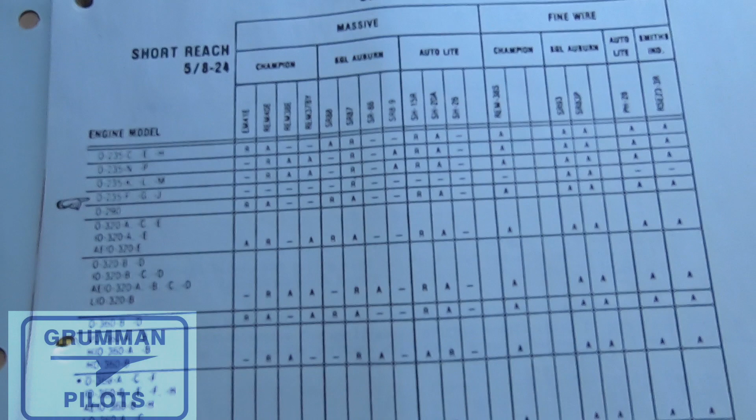Now, as you can see here, Ken's been doing this for quite a while, back when he was at AirMods, before it became AirModsNW and moved. But anyway, it starts out with all the approved spark plugs, both the long and the short reach that you can put along with fine wire in your O-235 when it's been converted. So that's all very nice.

He also gives you the cover letter of the STC for the conversion, and this is for converting the O-235 L2C to the J2A configuration. Basically, you're putting in high compression pistons, you're going to need an oil cooler, you're going to need a Sensenich propeller, and you're going to need probably a dynafocal mount engine if you can get it. But anyway, all the paperwork came when you ordered from Ken when you got the STCs.

And if you ordered the full meal deal, as he called it, with all the conversions, then you got the oil cooler, you got the baffle seals, and you got the baffles. And the nice thing about all this paperwork is, here it is back when it was all approved back in 1984. And there's a signature from Dave Wheeler.

I'm going to say hello to Dave right there. Dave was also the flight instructor for AirMods. He and Ken go way back. I've still talked to Dave now and then.

But anyway, with all this stuff, you got an airframe manual, a supplement you could add to your manual showing you what changed in terms of operating speeds, limits, RPMs, everything else you needed when you did the conversion. The paperwork was all signed and notarized by Ken. This is for the Sparrowhawk conversion, for the 150 and 152 models. And believe me, 125 horsepower continuous behind that Sensenich prop really makes a difference in the performance and handling of the airplane.

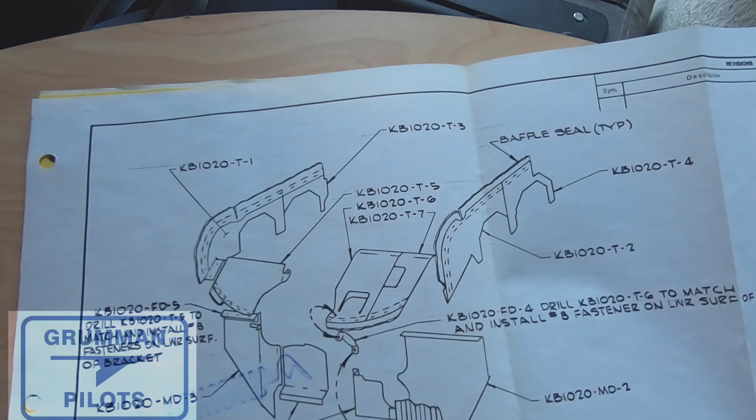Now, along with the baffle seals, which also have their own numbers, it came with a full set of drawings of how everything goes together, how the oil cooler fits in, how all the pieces get bent and drilled to do, and including how to make the little brace that you see right there going by. So again, it was a pretty complete package you bought from Ken back in the day.

And again, the cost back from Ken in those days was $450 in US dollars. So anyway, it had all the diagrams back there. They all fold out, so they will require a large format scanner for me to be able to get them into a PDF to send them to folks if they are needed. But there was quite a bit, and everything has been labeled.

It's all part of the STC package, and this is back from AirMods Corporation. So I know that I've been contacted over the years by a number of Cessna owners looking for the Sparrowhawk baffles that they talk about. Well, this video is going to be out there, and hopefully by looking for the name Sparrowhawk, you will find it. And again, these are the STCs by Kenneth Blackman.

He used to be with AirMods Northwest, and it's for the model 152 and the A152 Aerobat. So again, it works with the baffles and the seals for getting better engine cooling when you do the conversion, and that's advantageous for any airplane for the life of the engine. So ladies and gentlemen, we hope you found all this useful and informative. There's a few more pages I'm going to throw by here for you, but you kind of get the gist of it. And I'm going to throw a little music here, and I'll see you at the very end.